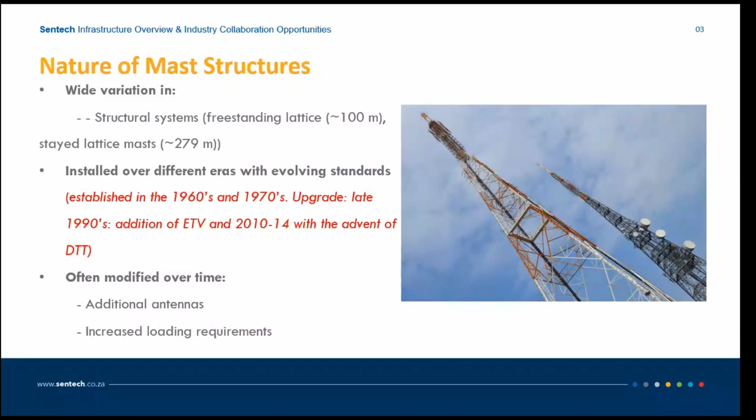Gary, are you on the line? I am indeed. Okay, I'll keep on presenting. You'll just direct me to move the slide. I want to share the full photos if I can. Okay, can you see that photo? Yes, okay.

Good afternoon, everybody. Sasi, thank you for the opportunity, I really appreciate it. So as Nikili has said, we have a large network of both freestanding lattice towers and stayed lattice masts, everything up to about 279 meters, that's our tallest stayed structure. This particular photo I'm showing you now is actually just a 157 meter high mast. This is what Sentech would call a standard Liber 570 foot mast.

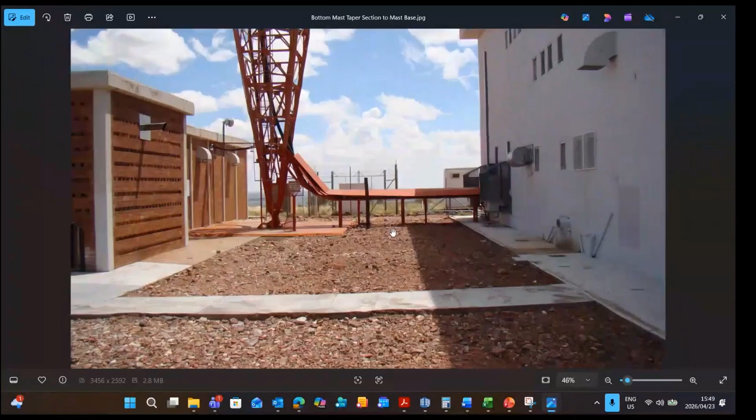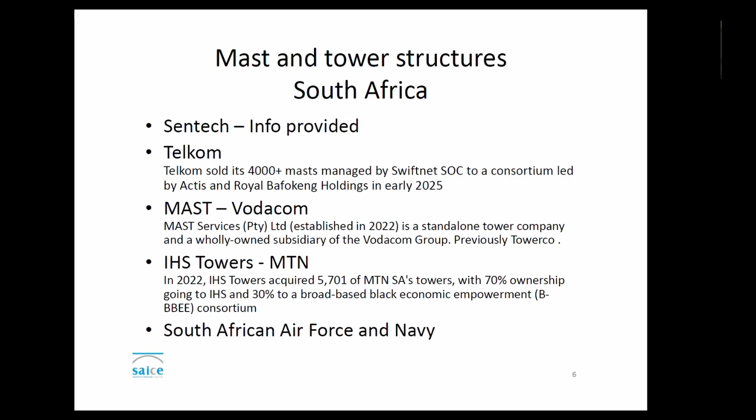And then MTN has a company called IHS Towers, which manages about 5,700 masts for MTN. And then I think another one I could think of was South African Air Force and Navy - they also have mast and tower structures, but I think they might be linked to the Department of Public Works in that environment. So there we are - this is the South African Air Force at Waterkloof Air Force Base.

This is the VHF, if I'm not mistaken, masts for the communication with aeroplanes.

Interestingly enough, I talked to a person I know in Pretoria whose son flies for Emirates. He likes to look at the flight radar when his son is flying. When they fly over the pole from Dubai to, say, San Francisco, at a certain latitude they don't use the satellite systems anymore - they switch to VHF. So this is still a very active communication and navigation system used by aircraft.

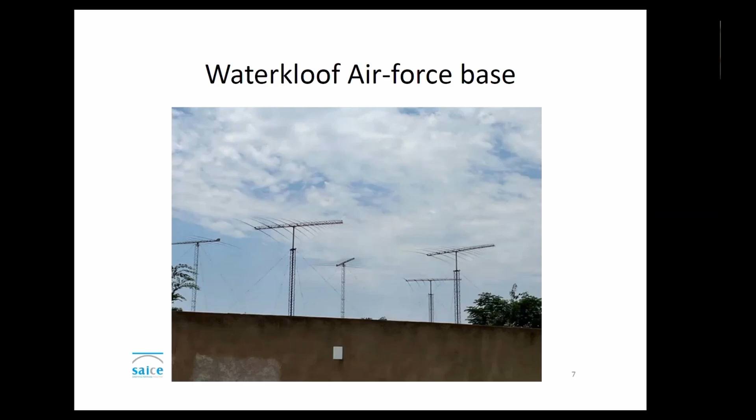There's a company called Telecommunications Masts and Accessories in South Africa, which has a website with a number of examples of their products on it. I also have experience working with a person from there - I don't think the company exists in this format anymore, but they were working on light duty masts, for example for instrumentation.

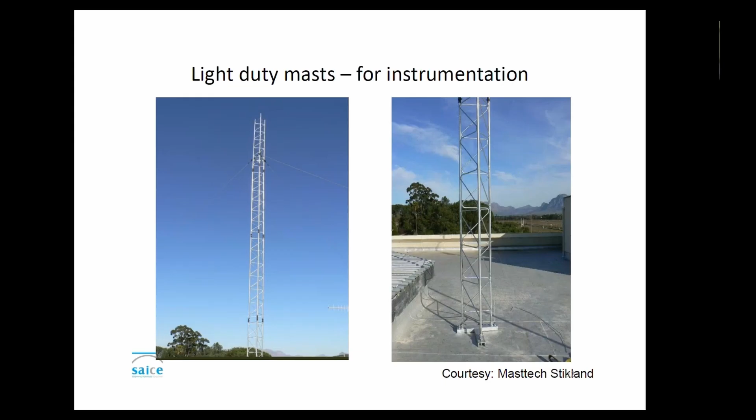They did quite a lot of work for the wind power and wind turbine industry, putting up masts to sample wind speeds and other measurements with instrumentation at certain sites where they were developing wind power.

The typical structures found in the mast and tower environment: monopoles, lattice towers - either freestanding or guyed or cable stayed (some people use the word 'guyed', some use 'cable stayed'), concrete columns and towers and masts, timber towers, and of course all sorts of other forms of communication structures.

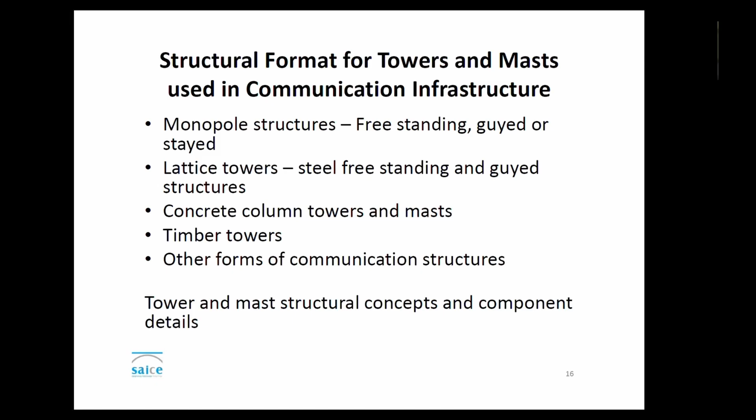If we look at some examples, I took this from MTS Towers' website - some samples of construction formats one finds. There's a very wide variety depending on what kind of load one needs to put onto the structure and what kind of environment it needs to operate in.

One can come up with a wide variety of structural formats, both in monopole format as well as in lattice structure format.

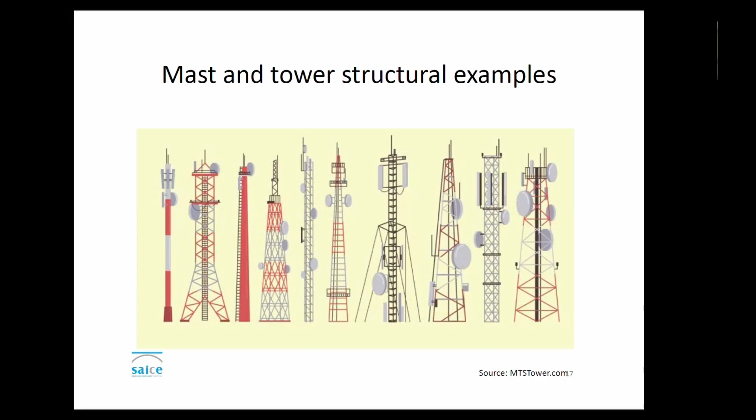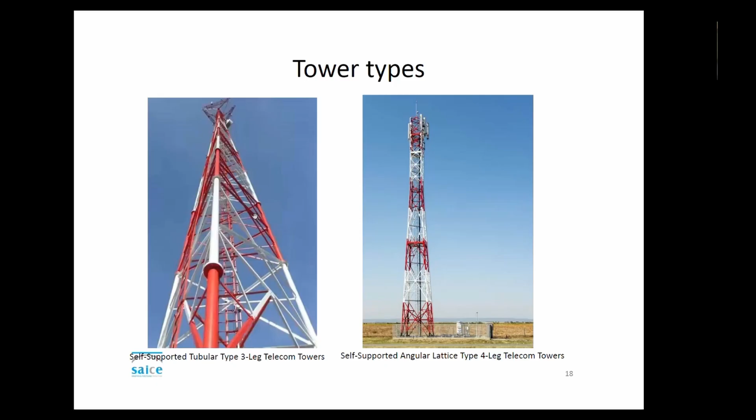On this MTS website, they also have some examples of structures. You can see in this case they have a pipe section on their main members. Sometimes, on the lighter structures, you have angled members instead.

I must also note, although we're not dealing with it today, the power industry transmission line environment, which has a similar kind of approach to keeping their cables in the air.

So if we look at the design criteria for towers and masts, this is the overall approach. Typically there's a structural and an electronic requirement. On the electronic side, you have low frequency, medium frequency, VHF and UHF, digital audio broadcasting as we heard, and then mobile phone antennas.

And you also have microwave structures or microwave transmitters, which need to be supported by these structures. Of course, there's corrosion and fatigue which one needs to look at, and in some cases also seismic loading.

On the structural side, we need to be able to work with truss models, beam models, and cables. And we also need to look into structural displacement requirements for both static and dynamic loading. On the wind loading side, we have the along-wind response in the direction of the wind, and also there's a whole issue about crosswind response, like vortex shedding and galloping, which has to be taken into account both for your cables as well as for the rest of your structure.

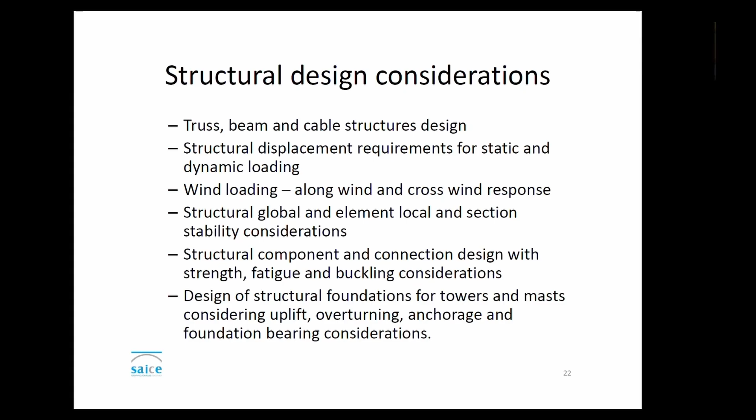Let's just look at the design codes which I could find. This is a sort of worldwide view: South African, UK, United States, Australia, and Canada. The first one I've got here, where you find a specific design code for steel structures on towers, masts, and chimneys, is the Euro Code 1993.

And that links to this, on the steel side, that links to the Euro Code 3 Design of Steel Structures document. So in this document, you'll find guidelines for design of your steel structures for towers and masts.

Then in the United States, there's probably a International Building Code as well, linked to something like the universal code, but the one which is quite well known is ASCE 7, design loads for buildings and other structures. And then on the tower side in the US, the American National Standards Institute is linked to the Telecommunication Industry Association, which has a document TIA 222, structural standard for antenna supporting structures.

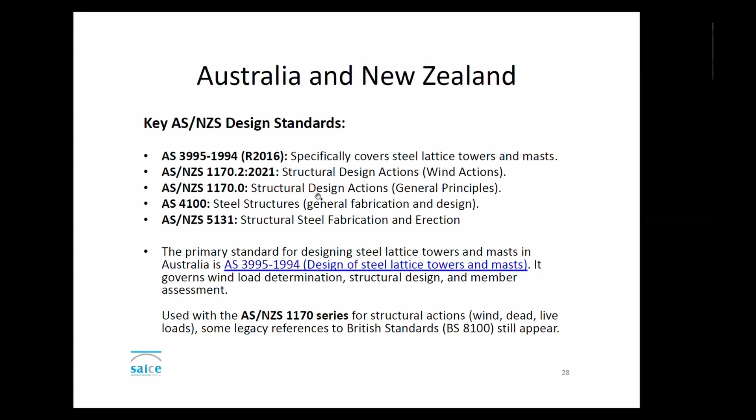In Australia and New Zealand, one has this AS 3995 code, which is specifically for lattice towers and masts. And then, of course, you also have the link to these normal structural design codes, which are applicable in Australia and New Zealand.

Canada has two Canadian codes which I'm just going to mention here. The one is the S37, which specifically also deals with antennas and towers and antenna supporting structures. And then the S16, which is a steel structure design code, which of course links to this previous document.

South Africa, we all know about SANS 10160, parts 1 to 8, and then we have our structural use of steel 10162 for hot rolled steelwork, and 10162 part 2 for cold formed steel structures. So we don't have any specific document in South Africa dealing with towers and masts. I think he was mentioning that we probably need to look into some standards for the South African environment. So let's just look at the structural loading.

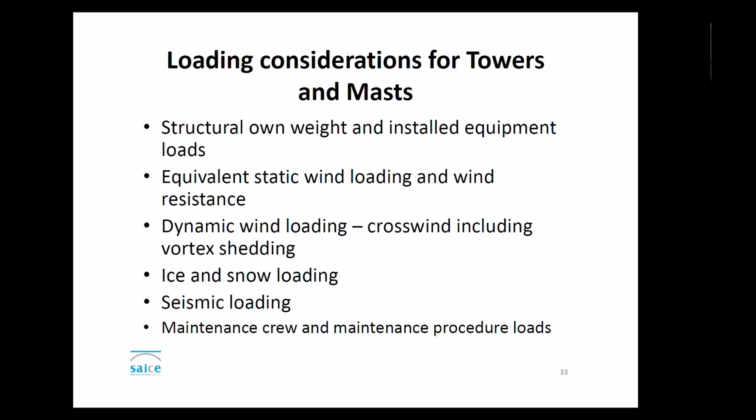As far as wind is concerned, we have our standard long wind loads which we can get from our codes. But we also have to consider that the wind resistance of a tower due to ice on the structure can change dramatically. This is an example from the book by Smith on communication structures. You can see that your structure can actually ice quite well, the ice load is quite important, but it's also changing your wind profile for the long wind response of your structure.

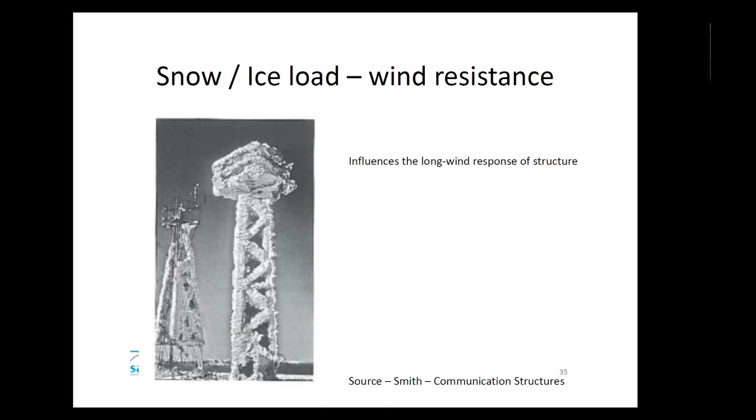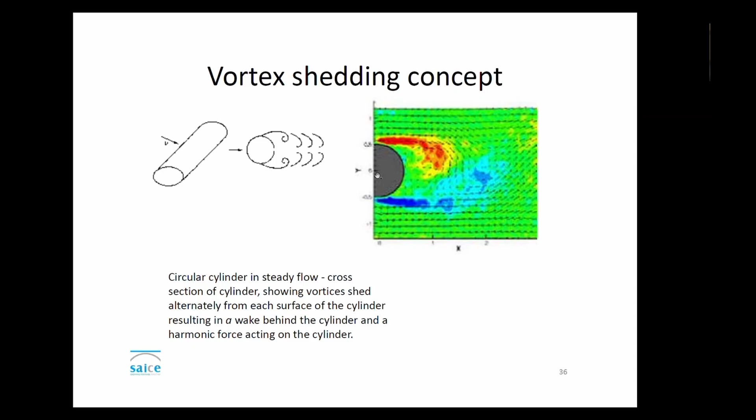Another one to take note of is the so-called vortex shedding concept. If we have wind blowing from this side onto this structural component, represented here by this semicircle, you get so-called vortices which form behind the structure, and then you get vertical motion of the structure due to wind movement from left to right on this screen. There's a basic formula for how you calculate your critical wind speed, and interestingly this critical wind speed is not very high. It can be just a few meters per second depending on the structure, where this phenomenon can start playing a role.

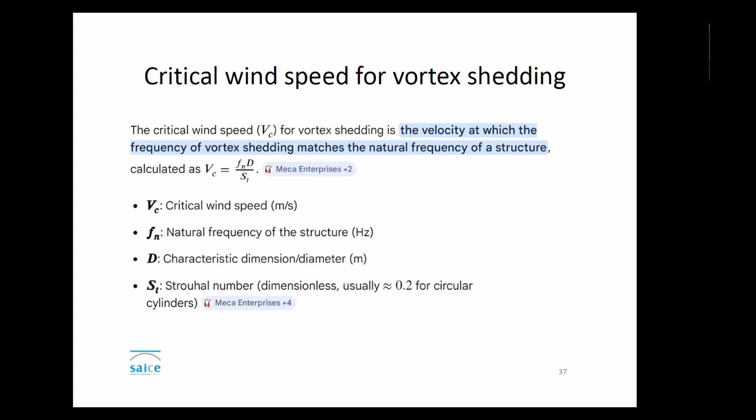There's also a dimensionless number that appears in the formula, which for our example is typically in the order of 0.2, the so-called Strouhal number. So there are our parameters, but I don't think we need to look into that in more detail.

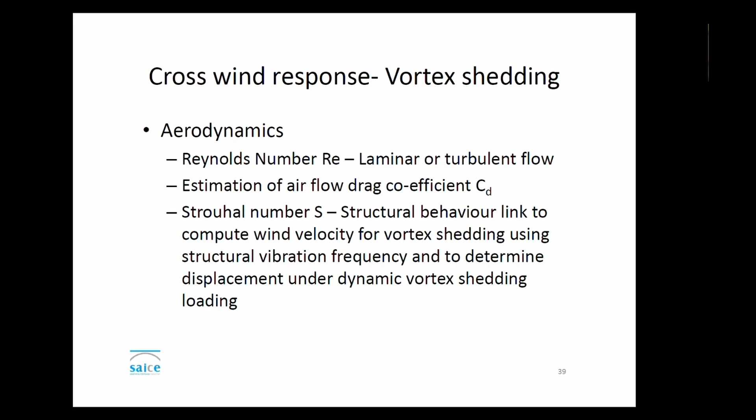Let's look at the crosswind response a bit more on vortex shedding. We can decide whether we're in the laminar or turbulent flow environment. Typically in the wind case we're in the turbulent flow environment, and then we have to estimate the drag coefficient that determines the force exerted on our structural component. The Strouhal number is a structural behavior link used to compute the vortex shedding using vibration frequencies and determine the displacement under vortex loading.

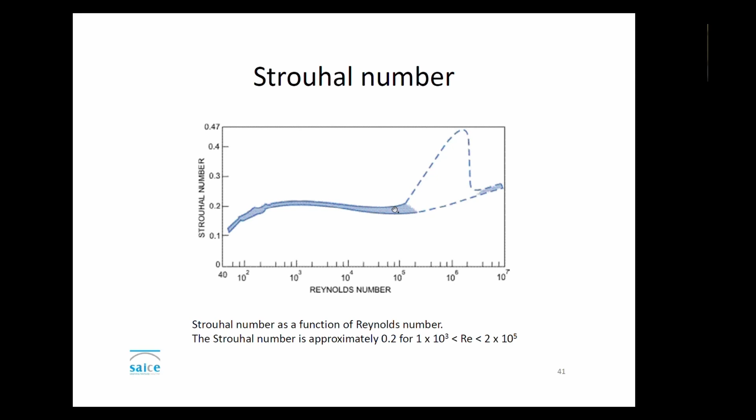There's also something called aerodynamic galloping of cables or flexible structures, where you need to compute the critical wind speed at which this phenomenon might appear. It also happens that when your cables start icing, the cross-section changes shape, which can cause galloping to occur at a lower critical wind speed than you'd expect, or at a different wind speed. In this case, you have the so-called Den Hartog coefficient, calculated from the term at the bottom, a combination of your drag coefficient and CL, which you need to estimate this critical aerodynamic galloping wind speed.

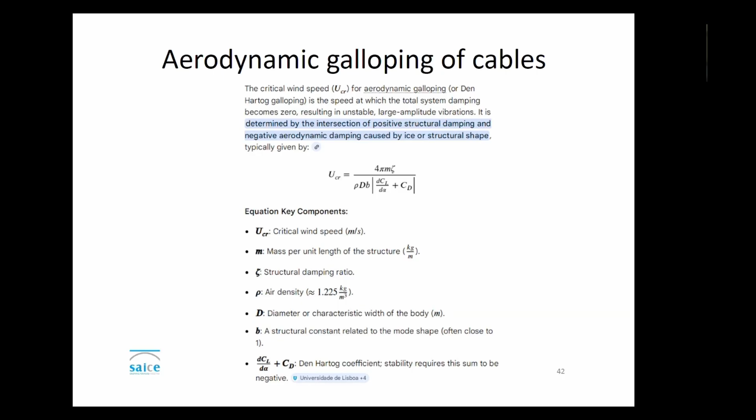I just want to show you an example of what happens when... sorry, what's happened to my... just hang on one minute, I just want to find my presentation here. Oh sorry, I want to stop sharing.

Oh sorry, seems I'm in my... that's interesting. I might have pressed the wrong one. I'm in my PDF version. So sorry about that. But in this case, I've got a video. Oh, there we are, here's the video. Sorry.

So there you could see the effect of this vortex shedding, or galloping. It's more like vortex shedding from the wind blowing across this parking boom.

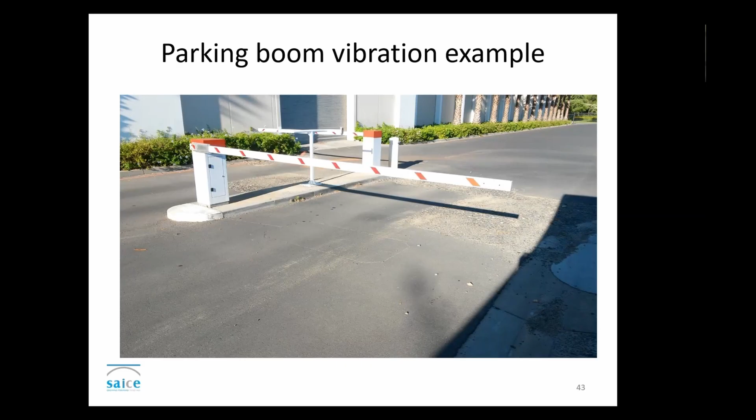The main reason why they are there is to react to lightning strikes. These three towers form a so-called Faraday cage around the launch structure, so that in case of a lightning strike, it's not relayed through the rocket or any of the critical electronic components, or the fuel involved with this launch.

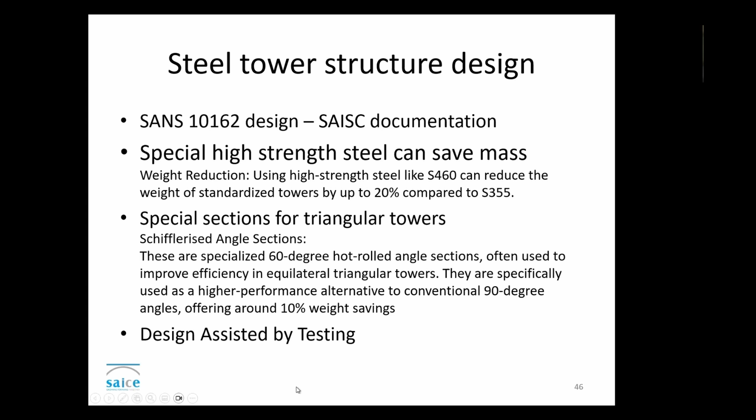You can probably save a lot of money by physically testing this product and making sure it's up to spec. Okay.

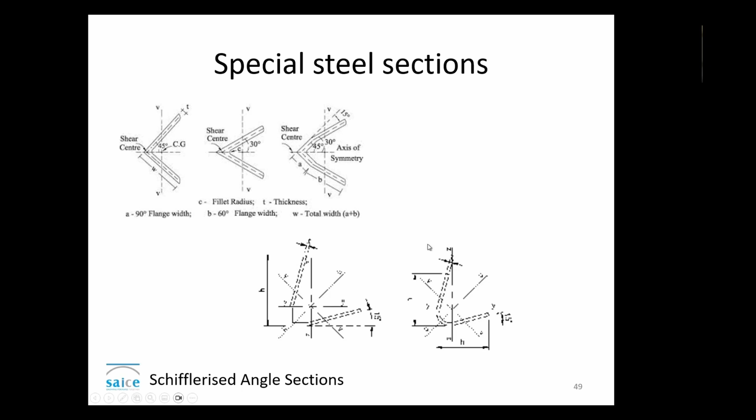I just wanted to show you the special steel sections. You can get a 60-degree so-called Schifflerised angle section which you can use on a triangular tower, and you can also use this modified angle iron with extra sections added on, giving you a 30-degree angle. Of course, on lightweight towers you probably have a round vertical section for your structural components.

And then in this case we also have mode 12, which is an asymmetric mode with displacement taking place at the bottom in this mode.

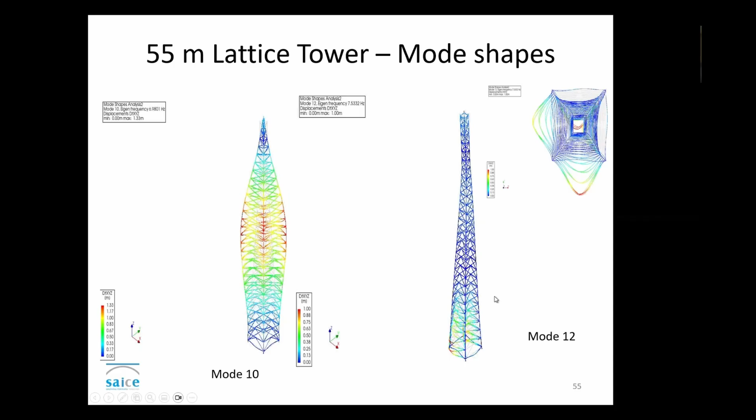And this is an important thing one must take note of. One also has torsion modes in these kind of structures.

I've had experience of one tower which failed in the DRC, but it was not a transmission tower or a telecommunication tower. It was actually a tower supporting a bridge, a cable bridge. And this structure failed due to this torsion mode. This is just an example.

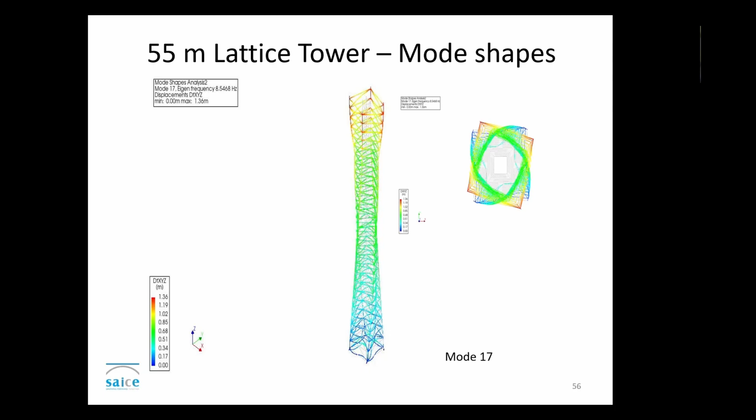Mohammed will also probably talk much more about dynamic analysis. So if you have 20 modes in your dynamic analysis for your modal response, you're getting 73% of your mass which is actually taken into account.

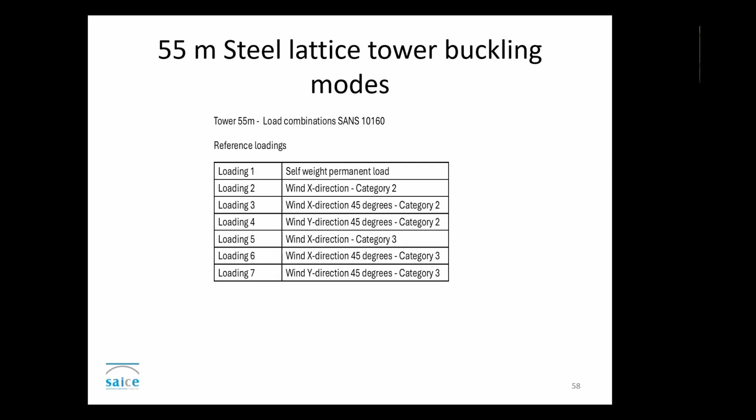Then we also looked at the buckling because of the buckling problem. Here's just a few of the loading cases we looked at, and there's the loading combinations according to SANS. And then we did a buckling analysis.

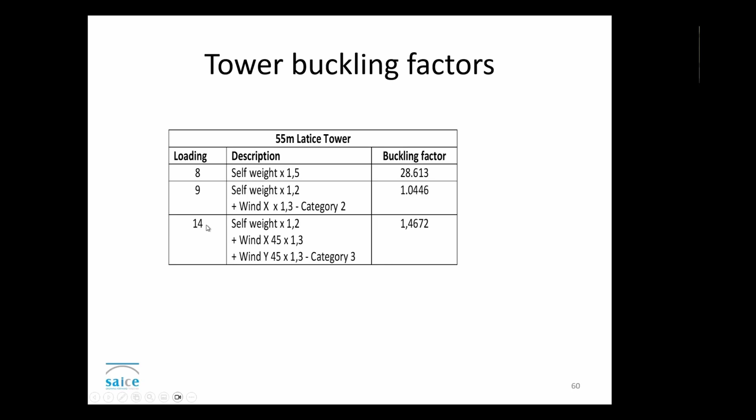Load combination number 8, we had a buckling factor of about 28. That was just self-weight. But then load combination 9, when we added the wind in the X direction, we found that we were critically close to a buckling situation. And also if the wind was a little bit stronger than we expected, then at load case 14 it was also indicated that there might be a buckling problem.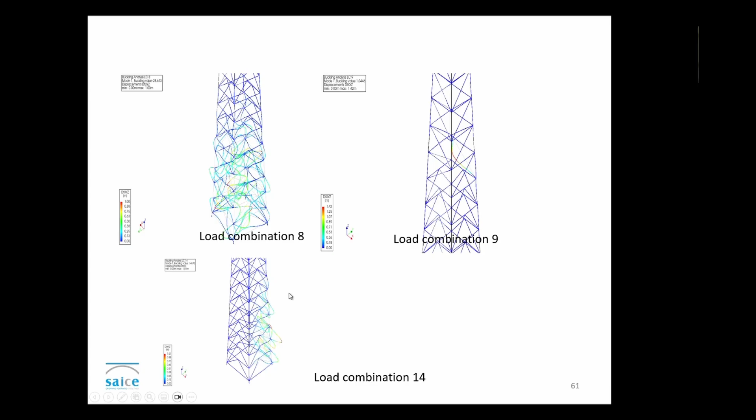And this was then actually manifested itself in the field, where they had to go in and replace some of these components and strengthen them because of this buckling problem for this tower under high winds.

So dynamic analysis, we'll hear a little bit more about that from Mohammed. We can actually have a frequency domain analysis or a time domain analysis. And of course, seismic analysis can also make use of dynamic analysis procedures.

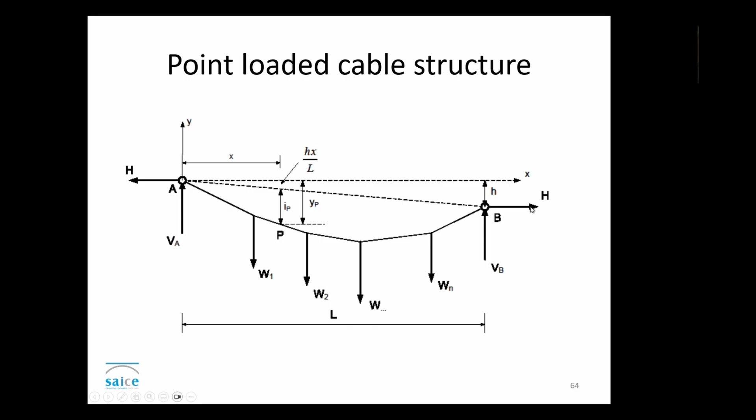I'm just going to run down on cable structure analysis just to lead into that. So cable structures are of course non-linear structures. So if we get going with cable structure analysis, we can start off with a weightless cable just subjected to a series of point loads, and this we can do with our normal basic statics: vertical equilibrium, horizontal equilibrium, and our moment equilibrium. And here we have our tension force, horizontal tension force in our cable, which of course determines the shape of the cable.

And you can, for example, solve a structure like this as well, but now we're assuming weightless cables just to get going. The next step is the so-called parabolic cable representation, where you assume that the loading on the cable is distributed horizontally and not along the cable profile.

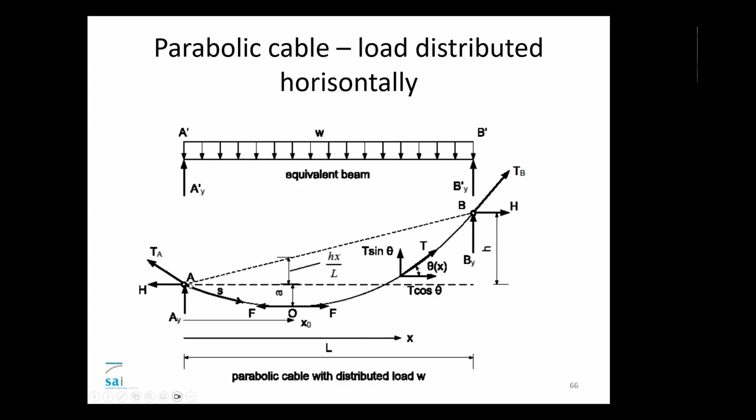Of course, this cable now is a steep cable. The point B is higher than point A, so we can see that the tension force at B will be larger than the tension force at A. It's not a horizontal cable.

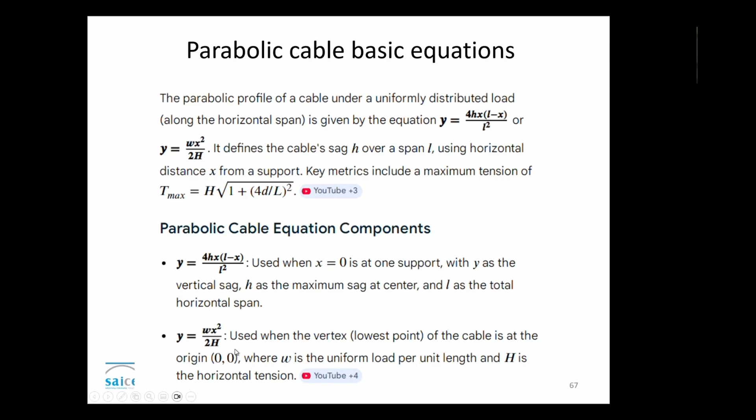So here's the basic equations for a parabolic cable, either taking the origin at the left-hand point or the origin at the middle. And there's our horizontal tension. The horizontal tension is linked to the sag, where D is the maximum sag of the cable, L is the span, and W is the load per unit length horizontally. We can calculate our maximum tension. We can calculate our cable length after the sag has taken place using that approximate formula.

Inclined geometry and forces in cables. Of course, the moment you go inclined, the math gets a bit more difficult, but that can also be done.

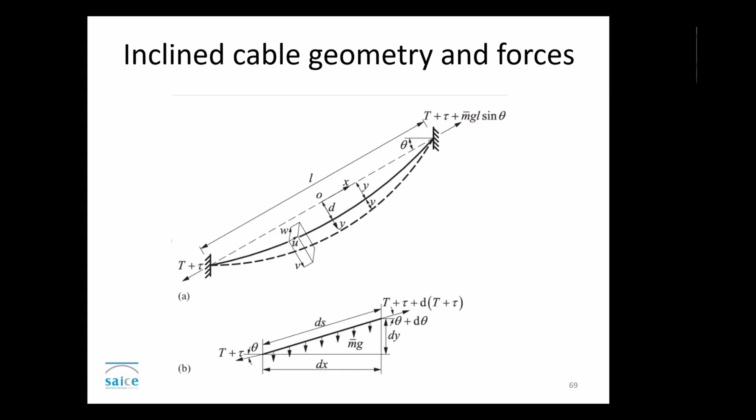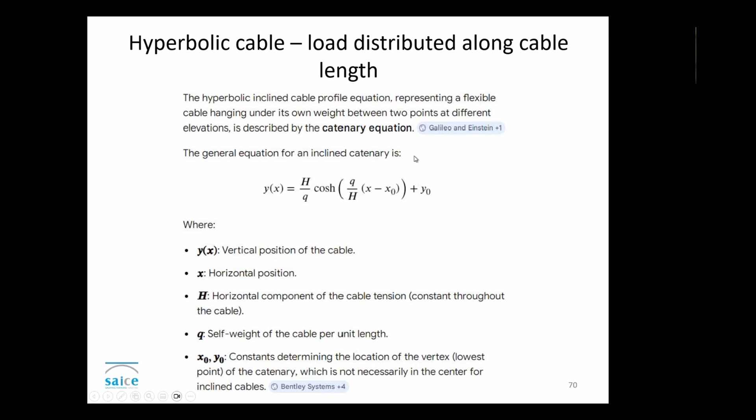Everything mathematically gets a little bit more difficult, but you probably need to do that when you run into a cable which has quite a serious sag, and then you talk about the catenary formulation, which is based on this hyperbolic cosine math expression.

To model a structure using this very basic cable element, you actually need to divide your structure into quite a large number of elements. One can also get 3-noded, 4 and 5-noded elements. I think one program even has a 7-noded cable element to represent cables where the curvature is quite severe.

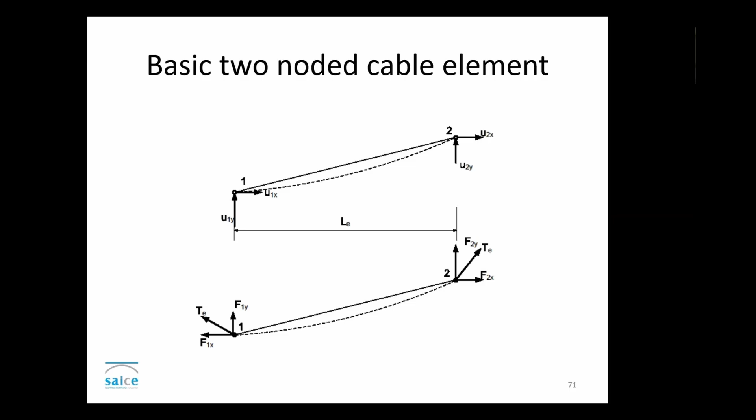So we're into the world of non-linear structural analysis when we work with cables, and of course then we need large displacement analysis. Typically we have small strains but large displacements. So we are going to work using our Newton-Raphson approach. It's an iterative process to solve our problem, and unlike linear analysis, non-linear analysis requires multiple iterations with load increments to solve our problem.

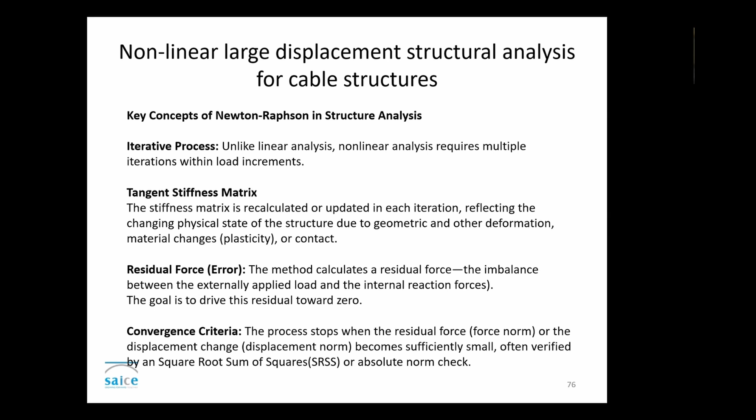We use a tangent stiffness matrix, meaning the stiffness matrix is recalculated at each step of our iteration. This is an option; some types of algorithms don't do that, but you can typically assume that when you have large geometric deformation, then you need to do that. Then you have to calculate the residual force error, check your convergence criteria if you're happy for the point you're in your solution, and then you step to your next load step.

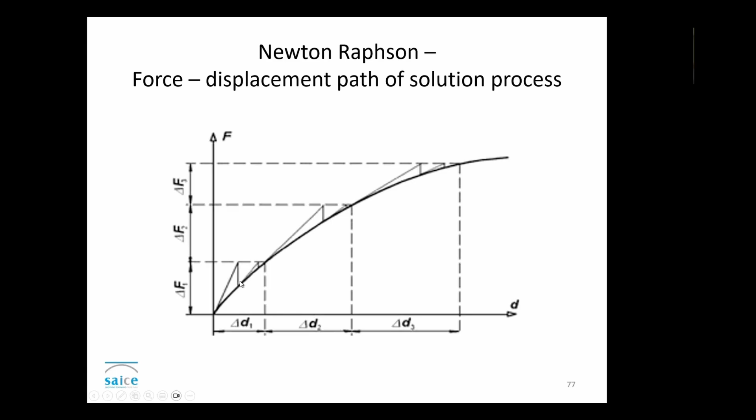Graphically, this is a very cryptic representation here, but the Newton-Raphson approach is we apply a load increment, calculate the displacement increment, and then we step after each load step. After we're happy that each load step is converged, these little lines represent the steps we take inside each load step. Then we carry on to our next load step.

Software. I want to say a little bit about software. There are quite a number of dedicated software products around for tower and mast analysis.

Bentley has got a product called Open Tower Designer. There's a thing called TNX Tower, ASM Tower. Safi Telecom also has a product, and then TS Tower by TowerSoft. And then Dlubal has an RF-Tower add-on, which one can also use.

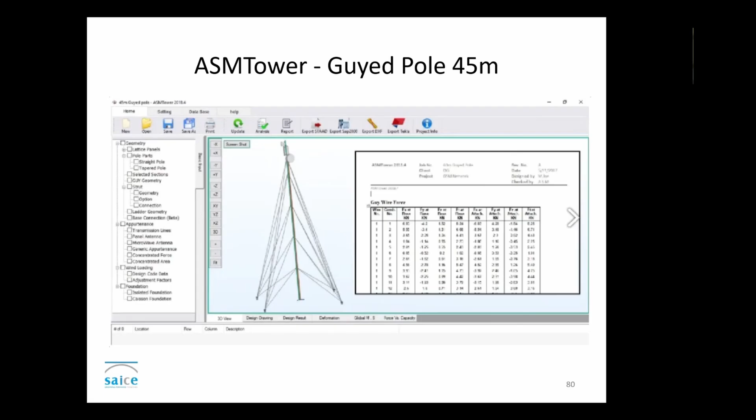As far as general purpose finite element software is concerned, I've had a bit of experience in Diana, which is a product originating from Delft in the Netherlands. And then, of course, Strand 7 is also very capable as far as non-linear analysis is concerned. It's a product which originates from Sydney in Australia. Both of these products are quite capable of doing any large displacement analysis required for cable supported structures and towers.

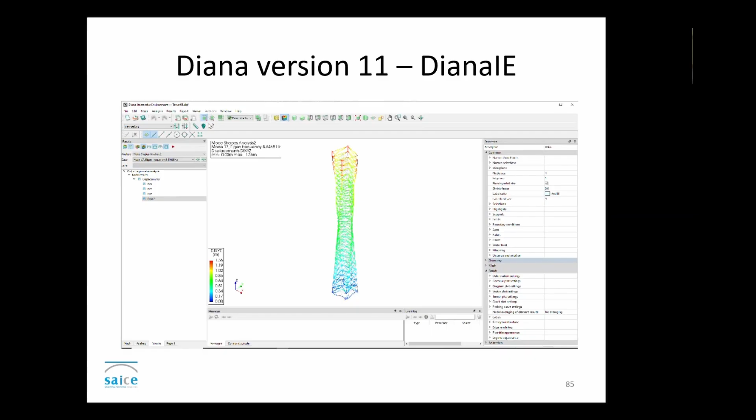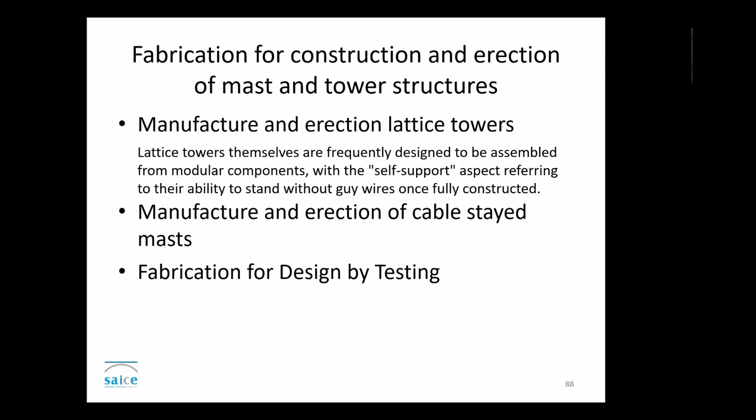On the fabrication and construction side, I just wanted to mention that there are quite a number of ways to get a tower up. You can manufacture components on the ground and add them up, and then use a crane to place them, or you can use something like a self-supporting crane to get your tower up.

With the advent of very powerful mobile cranes, this probably doesn't happen that often. But of course, you might have sites where your mobile crane can't reach, and you have to make a plan to erect your tower.

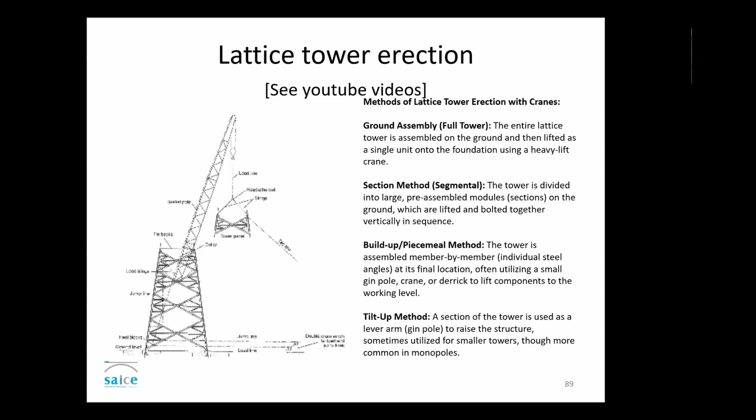There's also the so-called tilt-up method, where you build sections of your tower on the ground and then use a system of cables to lift it up. And as I've said, mobile lattice boom cranes, self-erecting towers, you can even use helicopters to place certain components on your tower. Especially when you get to your electronic equipment, you might need a helicopter to actually get it placed on the tower.

There's quite a lot of considerations one must think about. Is this partially constructed tower going to be stable? What's happening on site, and where is the site? And then, of course, personnel safety is a very important aspect of the whole construction process.

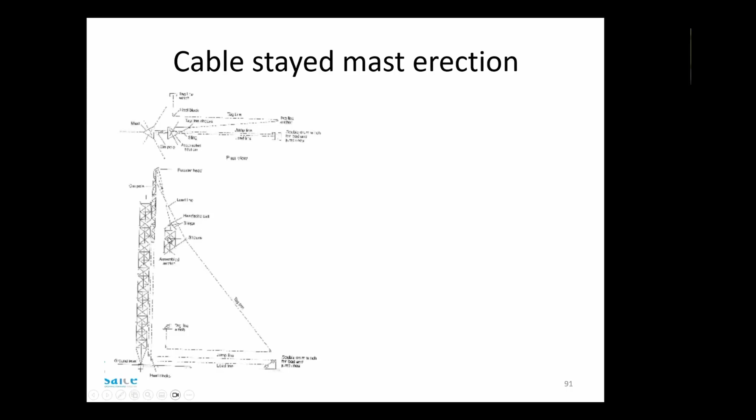This isn't a very good picture, but it illustrates a cable-stayed tower being erected, where you use the guy cable, or an extra guy cable, to actually hoist a component of the tower into position. To finalize my presentation, I'll give you two examples of failures.

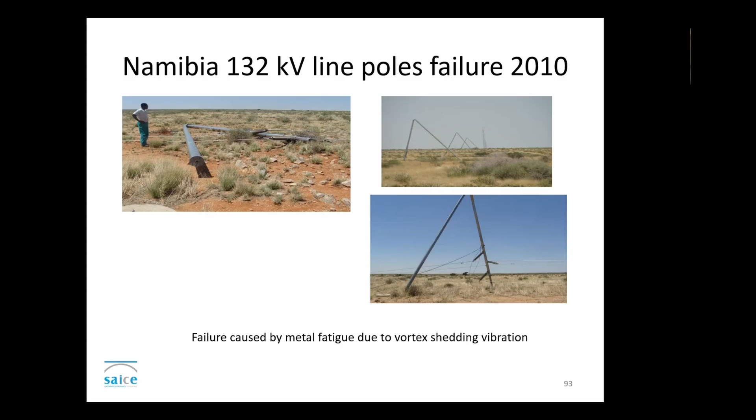The first one was a 132 kilovolt steel pole line, an electrical transmission line, which failed in Namibia in 2010. This was definitely due to vortex shedding. You can see what happened, and quite a number of these support poles collapsed. There are a few photographs of the damage, as the poles failed one after another in a sort of progressive failure.

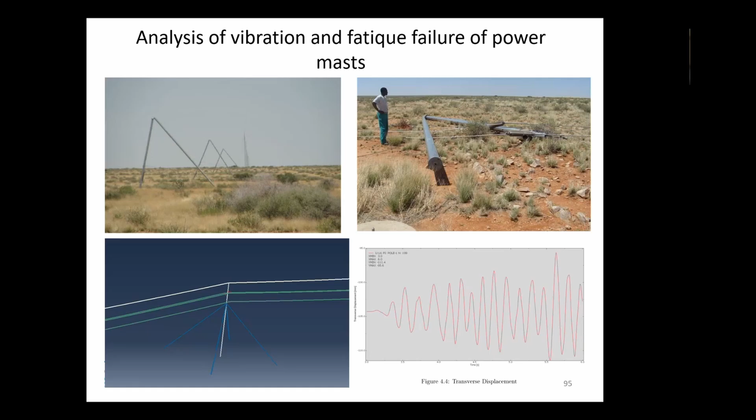This is the finite element model constructed to demonstrate the effect of the vibration on the structure. The structure vibrated due to vortex shedding, and eventually metal fatigue set in, and these poles just snapped. On the right-hand side, at the corner, you can see the transverse displacement, which eventually caused the metal fatigue that led to the collapse of these structures.

And of course, then your torsional stiffness would have been much larger. So once again, vortex shedding and wind pressure were working on this structure, and after a while the metal fatigue set in and the structure collapsed.

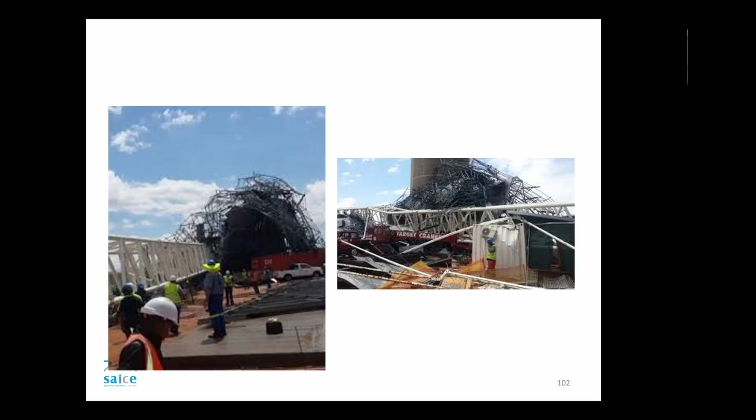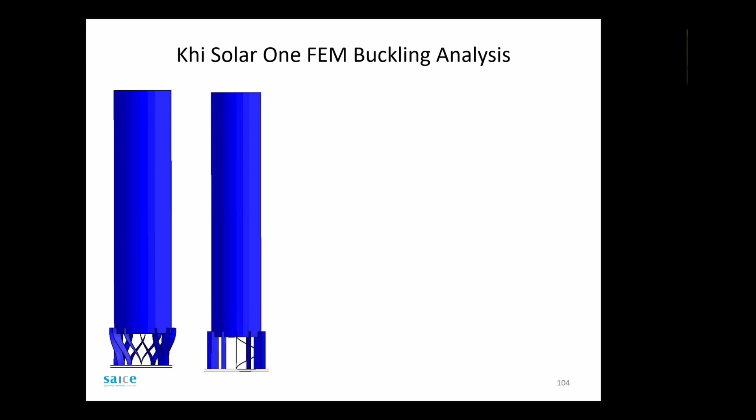We did some work on the structural analysis of the concrete tower. Here you see buckling analysis on that tower, and once again we have this torsional behavior on these supports, which the structural engineers had to look into and make sure that reinforcing and designs could accommodate this behavior.

Maintenance, I don't need to say much about that. Maintenance activities include inspection, tightening of bolts, foundation maintenance, corrosion control, guy wire maintenance, safety equipment availability, and lighting systems on these towers to warn aircraft about their proximity. Maintenance manuals also need to be available so people know what they're doing in this environment.

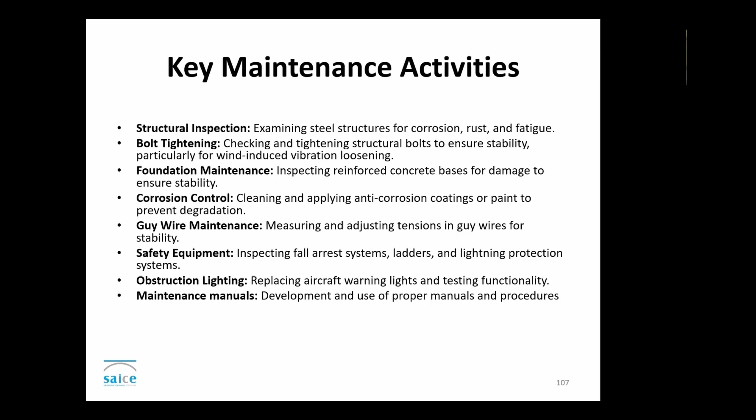As far as maintenance is concerned, at the design stage one must think the work through and make sure you're going for minimum maintenance, because lots of these structures are in environments which are difficult to reach. So we're thinking about galvanizing, painting, secure access systems, and avoiding water traps which might cause corrosion and other problems.

Ladders, platforms, and antenna supports are things which also need attention, to make sure they are properly fixed to the structure so they don't cause problems.

The other thing is the mixture of materials. If part of your structure is stainless steel, or part of a specific steel making up your cables, you must make sure you don't end up with so-called bimetallic corrosion, where two metals are interacting and causing corrosion.

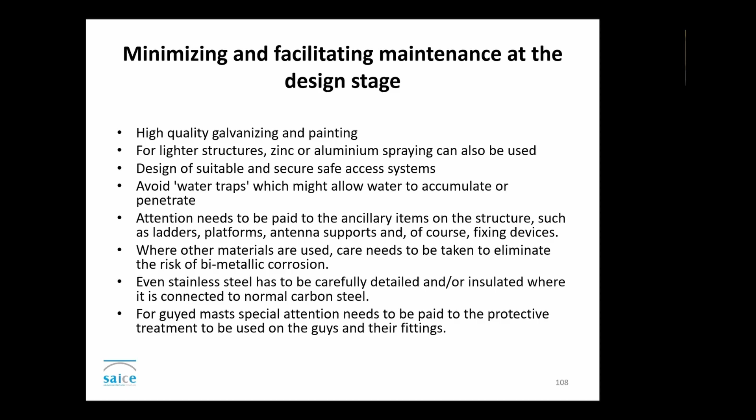And of course, we heard about our greased cables - the protective treatment on your guys and their fittings is also very important in the long term, to make sure your structure survives.

References, I've just put two down here. There's a book by Smith on communication structures, published by Thomas Telford in 2007, which has a complete encyclopedia of topics on this work. And then there's a book by Max Irvine, a very well-known theory book on cable structures, which is quite difficult to actually read. I don't know if there's any serious cable structure mathematical analysis book published after 1981.

Okay, Mr. Chairman, that brings my presentation to an end.

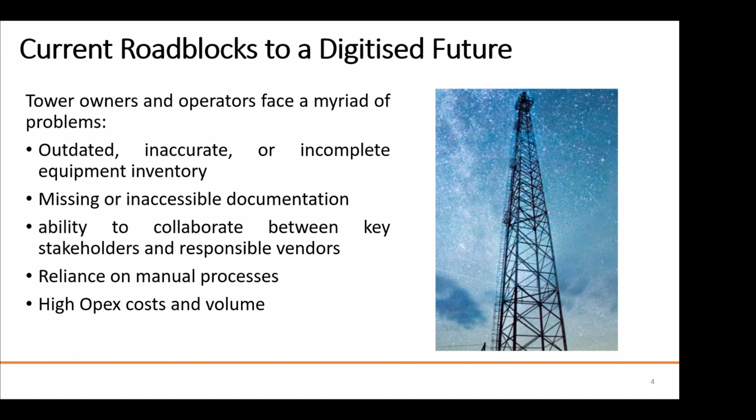So the question is, why do we need a digital twin, even though there is lots of discussion, as you've seen recently in social media, universities, and research institutions? So far, there's no tangible solution. Everyone is talking about digital twin solutions or virtual twins, but we are looking at the real application of digital twin. But before that, I'd like to take you through some history of the digital twin, how it became like this current stage in the world.

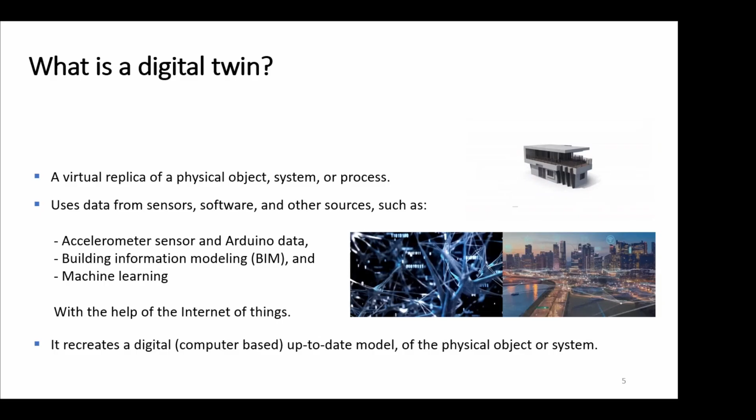A digital twin is a living computational replica of a physical asset. It continuously evolves using sensor data, modeling tools, and analytics. In our case, this includes accelerometer data from IoT sensors, structural models built using finite element method, and cloud-based analytics. Unlike a static model, a digital twin reflects the current condition, not just the original design. It captures the past, present, and predicted behavior of the structure. In essence, it allows us to see, understand, and anticipate how an asset behaves, not just make a guess.

The concept isn't new. In the 1960s, NASA, as explained by Dr. Streisheim, used mirror physical systems during the Apollo missions, including Apollo 13, to troubleshoot failures in real time. In 2002, Dr. Michael Grieves, the actual inventor of this technology, coined the term digital twin, formally introducing the concept describing a three-dimensional system, including the physical asset, a virtual model, and the data flow between them.

By 2018 and 2019, research done by various researchers—you're welcome to look into this field—but most importantly, Tao expanded this into a five-dimensional digital twin, adding services, analytics, and prediction. Importantly, while global interest is growing, practical infrastructure-focused implementation remains limited, especially in South Africa. That's where this research work positions itself.

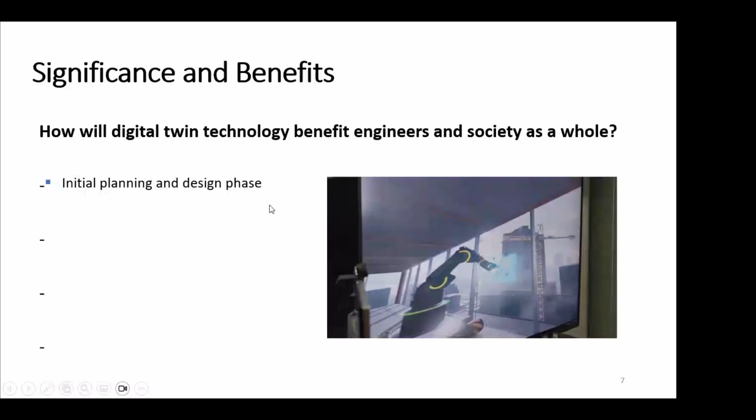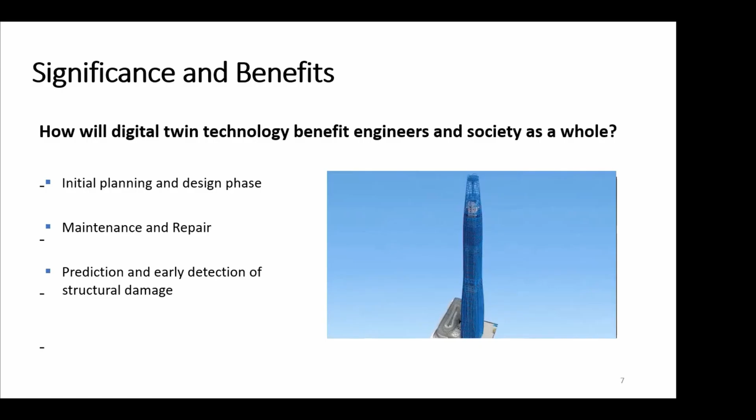So why should engineers care about this digital twin? Imagine a structure where design, monitoring, and maintenance are connected. Data updates the model automatically, and damage is detected before it is visible. Digital twin supports smarter planning and design, reduces site visits during maintenance, and enables early detection of structural degradation. At scale, multiple digital twins form connected infrastructure ecosystems can build a truly digital or virtually built environment.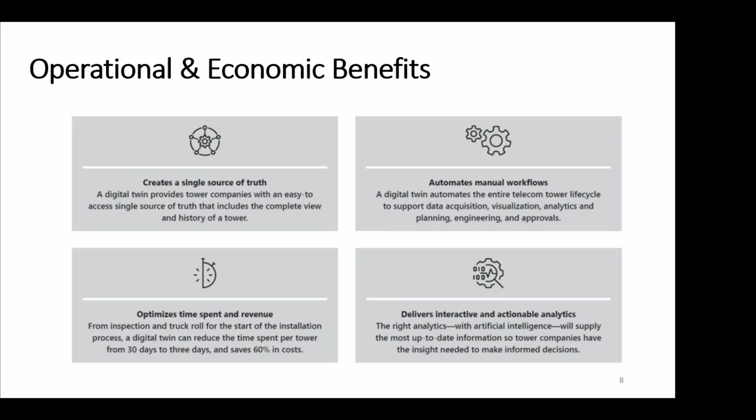So in summary, to summarize all of these backgrounds and studies so far, one can say that the digital twin is an innovative technology that can help solve infrastructure challenges by capturing past, present, and predicted future through the use of real-time and historical data, motivated by outcomes and tailored to use cases. A digital twin accelerates holistic understanding, effective action, and decision-making processes. From an operational perspective, digital twins may contribute toward reduction of unexpected failures, improvement of decision-making, and extension of asset life. Economically, they would shift maintenance from reactive to predictive, which directly reduces operational expenditure, especially for geographically distributed towers.

Now let's move toward what we have done in the past few years. While I joined Cape Peninsula University of Technology, I have a root at Stellenbosch University with massive knowledge in finite element modeling, seismic analysis, working with Dr. Strassheim in the computational lab. Building on that knowledge and combining the knowledge of seismic loading and finite element models, I came across this idea: why not build a solution that is cost-effective and can solve our problem here.

Now I'd like to introduce three potential technologies that later we'll see we can merge together to achieve a tangible solution. First, the physical assets. As you see, the physical assets can be any infrastructure. It can be a tower in our case, and perhaps partially instrumented with sensors.

I'm not sure if this is the case in South Africa. Second, finite element models that let us understand how these assets behave under stress and forces. And third, an IoT cloud that turns raw data into real-time insight. They are individually useful. Together, they are transformative.

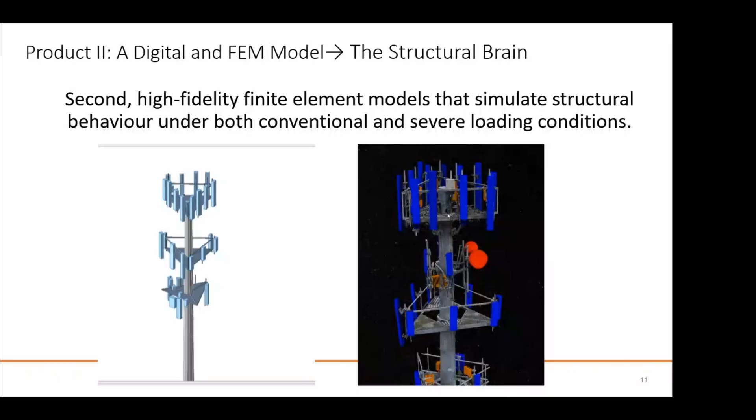Now let's give it live senses. The third component is the IoT. It's a nervous system. Sensor data flows from any sensors.

In this case, in our solution, we use the MPU 6050 sensor, accelerometer and gyro, with Arduino, ESP32 Wi-Fi, and we link it to a cloud system as an IoT. It's free for educational and academic use. If you use MATLAB, for example, ThingSpeak is one of the solutions you can use for free.

Then what we do, this gives us a real-time dashboard to control the data and remote access. You can see your data from anywhere at any time. You don't need to be on site. You can send the data through your Wi-Fi system to the cloud, and then you can observe your data and any failure or anomalies in your structure. So we have continuous monitoring from lab to the field.

So moving forward, I think now you see what's happening here. So far in the field of structural engineering, there are some professionals working in, let's say, a design office, and what they do is just the design. Some professionals, especially those working in the field, work through their experience to erect the towers or build them. And some professionals and engineers work by installing sensors on these infrastructures.

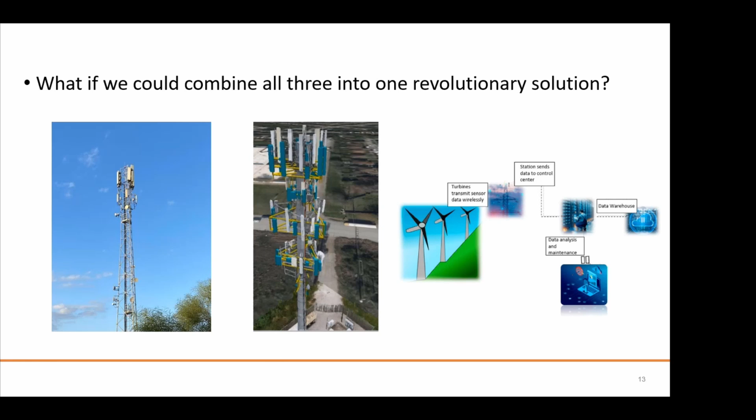So now let's look inside the system and what sort of elements we use. This is a digital twin model that we developed. We combine a physical model with a digital twin, enabled with IoT predictive maintenance systems.

In the lab, we used a simple aluminum cantilever beam as a tower proxy. Of course, the next phase of the model we developed is to use it in a real case.

Sensors feed data through Arduino into the ThingSpeak cloud, which links directly back to the finite element software. In our case, we use Abaqus finite element software to build our digital twin. This setup allowed repeatable testing and clean validation. As you see, these are the components that we use in our model.

Moving forward, we operate a hybrid model: physical measurements, virtual finite element simulation, and calibration that aligns the twin's frequency and damping with reality, producing decision-ready behavior.

The feature of our digital twin, it's a new version of the digital twin that was developed just last year. We started with the initial ideas, but last year we brought it to the next version. This is the reason why I call this digital twin 2. It provides real-time structural monitoring through data acquisition, visualization, analytics, and planning, approval and engineering data. So you can make a link and a process in this regard.

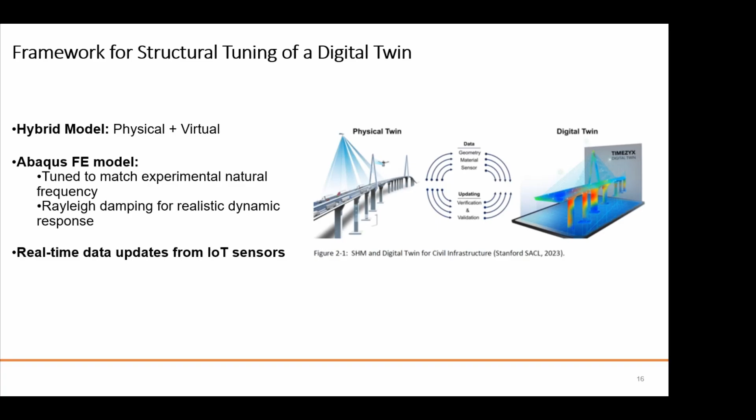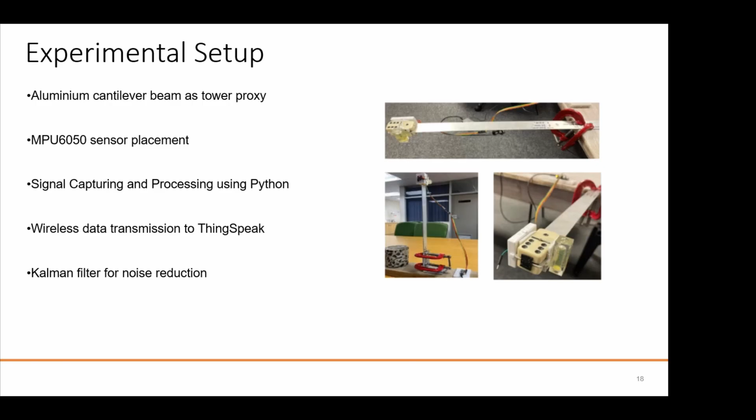So this is the experimental setup that we have. Of course, this is the initial version, developed by my students at the research lab. Data is filtered using a Kalman filter to reduce environmental noise, processed in Python, and transmitted wirelessly in real time through ThingSpeak.

So as you see, the next step after we collect the data from the cantilever beam is the most important part, as we need to tune our structure. Many engineers miss this part because we create a model using software, but we don't know if that model actually resembles the actual structure. So we need to do some certain analysis here.

We collect the data from the sensors, and then using a special approach with mass and stiffness tuning in the structure, by doing an FFT analysis—you can do it with any software—we get the natural frequency of the structure through signal processing, and then we try to match the signal with the one we extract from the software.

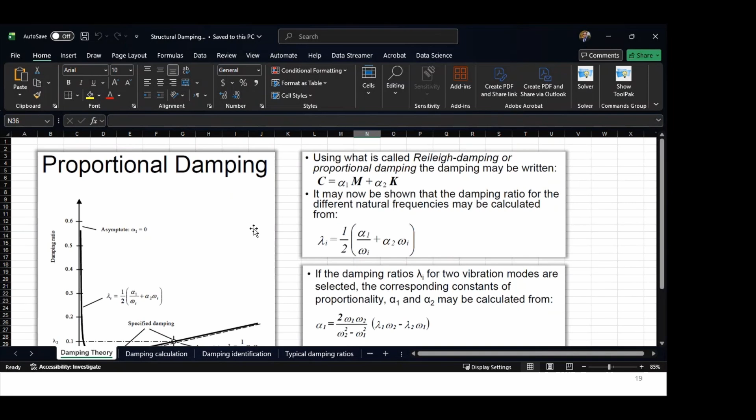So we use a Rayleigh damping approach. I have developed a spreadsheet for this purpose. For those who have passed dynamics of structures in their postgraduate course, you know there is a theoretical background using the dynamics of structures. One can find that if you get a signal from the sensors, then by manipulating some data and using dynamics of structures theories, one can get alpha and beta for mass and stiffness coefficients. And then these damping coefficients can be adjusted in the finite element model.

So if I share this message today, I think I've done more than enough, because this is most of the reason models get messy. Please make sure that you have the right damping in your models.

So then now we have a digital twin here. The model—for example, I use Abaqus to make a realistic model of the physical asset. It's a cantilever beam here, I will show it later. Now we ensure that what we have as displacement on these structures exactly shows the displacements captured by the sensors installed on the structures. So it is very important.

Now we can do lots of practices. Now we have a model where both frequencies and dampings are somehow close to the real one. Now we have this structure, we can do lots of scenarios. We can apply loads, seismic loads, and then we can get insight out of these real structures.

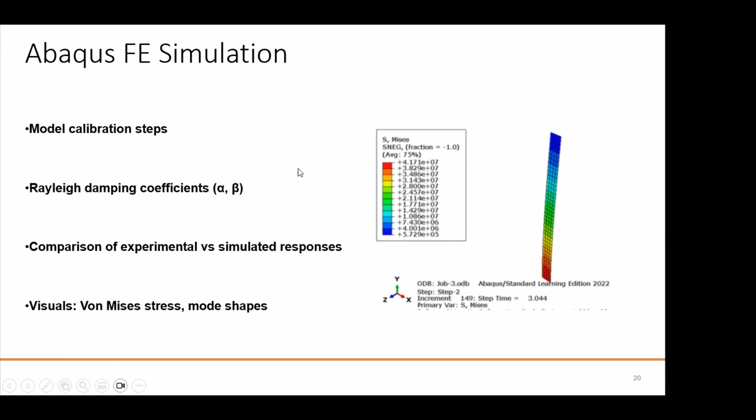So I'm going to stop here before I move forward for the final results. I'm going to show you what we have done so far. Of course, there would be more, perhaps a live session during the short course coming next month, but just for a demo, I would like to share with you some insight into what we have done so far.

Now this system is connected to my computer, and through a code that we developed using Arduino, I'm going to run it here so you can see what's happening. If I'm lucky—I did test it before the start of the session—I hope it's not going to disappoint me right now, but let's see how it goes. I'm running the code. It's getting compiled, please give me some time. All right, compiled successfully. Now I'm running the code. I'm waiting for a few seconds to get the signals from the sensor.

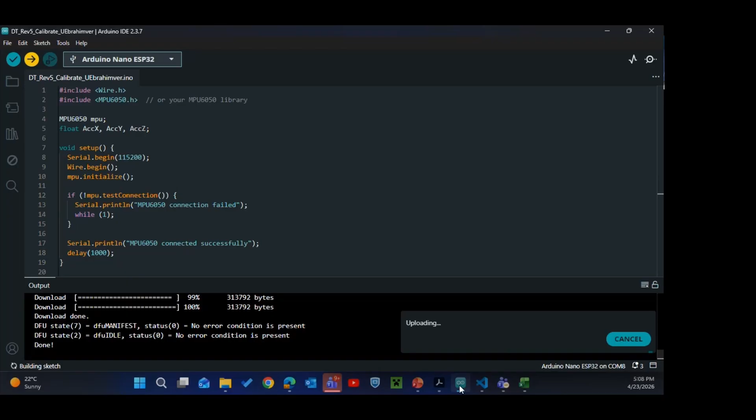All right, it's running successfully. Now we have run this model. The next step is a Python code that translates the signals from this software, Arduino software, to the visualization that we needed.

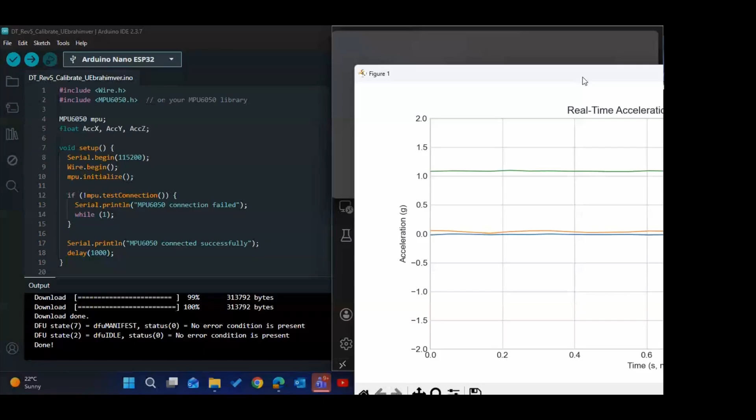I'm going to run this Python code. I hope that it's running again. Yes, the signal is coming. This is the signal. Now, as you see, I'm going to apply some sort of vibration. Let's say this vibration can be due to wind or any seismic loads. And as you see, it's live.

So this information now can be used as a starting point for your modeling. So this is very interesting. We are at this stage, and there are PhD students who wish to install this system on a real structure very soon. So it's coming in coming years, but through the collaboration with Centec, definitely more development will be done. So this is a real insight.

So as you see, the next step, unfortunately, I can't show you right now, but this information also can be sent to the cloud. Any cloud system, in our case, we use ThingSpeak. It's a platform through MathWorks, and it's free for academic license. If you have it, you can use it for sending the data, but we have done it successfully so that you can share that information through the channel, so that everyone, at any time, anywhere, can get those insights.

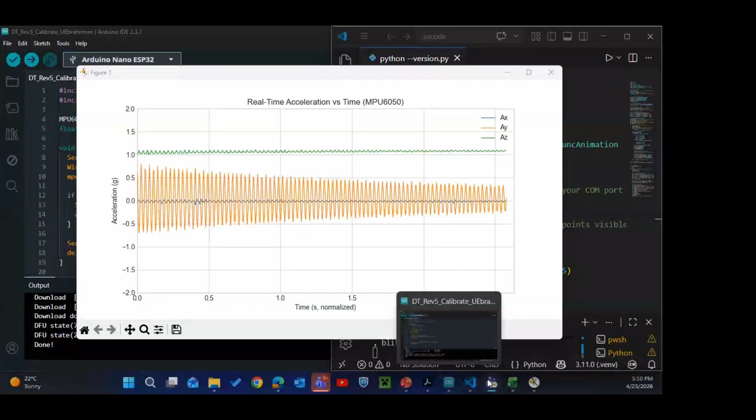So coming back to my presentation, as you notice, the key result is that we achieved high correlation between models, minimal data latency, and low-cost, scalable structures monitoring. With continuous data, we can detect faults early, schedule maintenance optimally, and integrate AI and machine learning for anomaly detection. This is an important phase.

I would suggest students, especially postgraduate students, there is a great opportunity now. You have access to an abundance of synthetic data that you can feed to machine learning and develop insights using AI solutions.

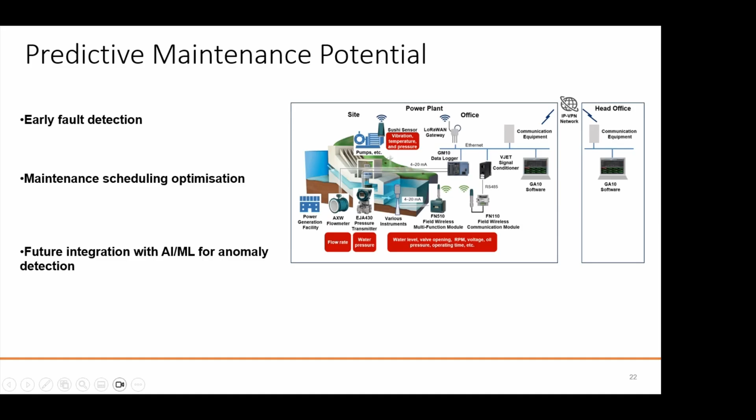Some limitations of the model, as mentioned, are lab scale validation, Wi-Fi dependency, and tower-only dynamics. So we are hoping with more collaboration with industry, especially the tower industry such as Centec, we can get more access to more infrastructure and install this solution to get more insights.

The next step is full-scale tower deployment, environmental load integration, AI-driven analytics, BIM and SCADA integration, and importantly, the same architecture applies beyond telecom. Thank you for your time. I look forward to your questions and discussion. Thank you so much.